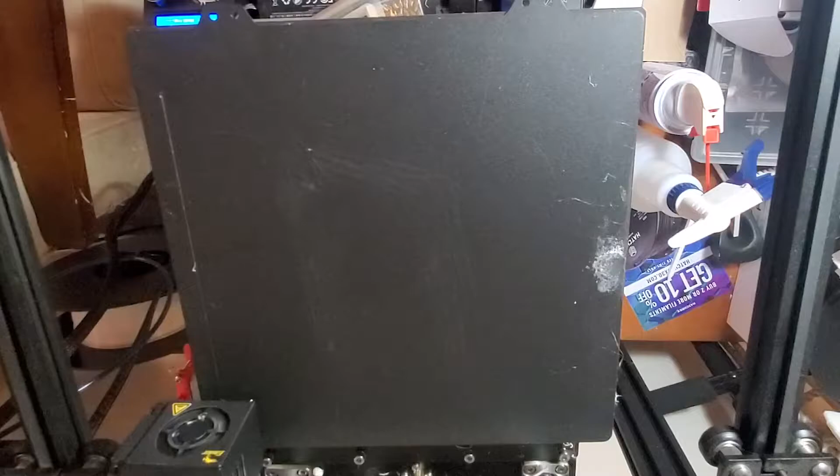Alrighty, this is the first time this is all assembled. I'm really looking forward to pulling this thing back. Hopefully it works really well. I haven't put it in the magazine, but we'll see.

Huh. I miscalculated something.

Hello all. I wanted to show you guys my crossbow project, my Expo project: 100% 3D printed parts, no steel, no extra gizmos required, just 100% printer filament and a little bit of super glue.

I've been working on this project for a couple months now, and I really want to show you guys the 3D modeling touch-ups and some of the labor it takes to put one of these puppies together.

Also the design process through iterations. You'll see me fail over and over.

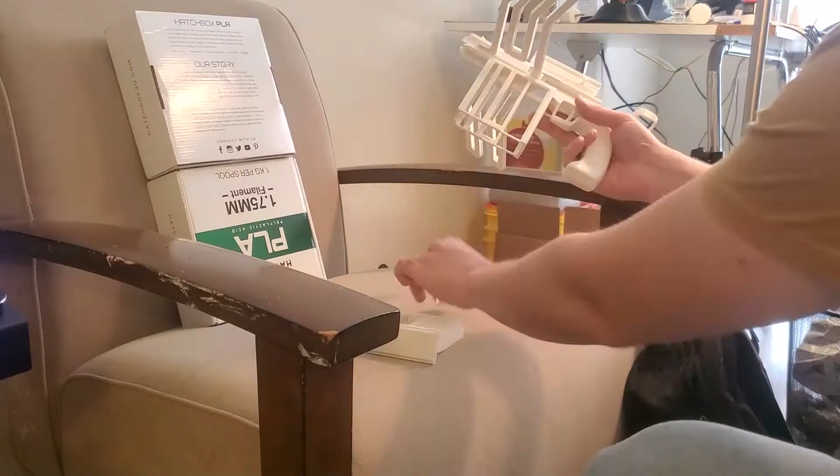Yeah, enjoy. Loads up. You got one. You got two. It's loaded.

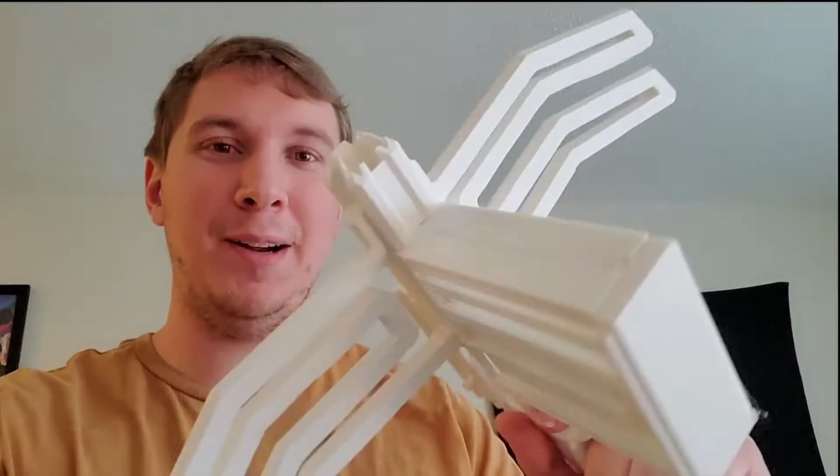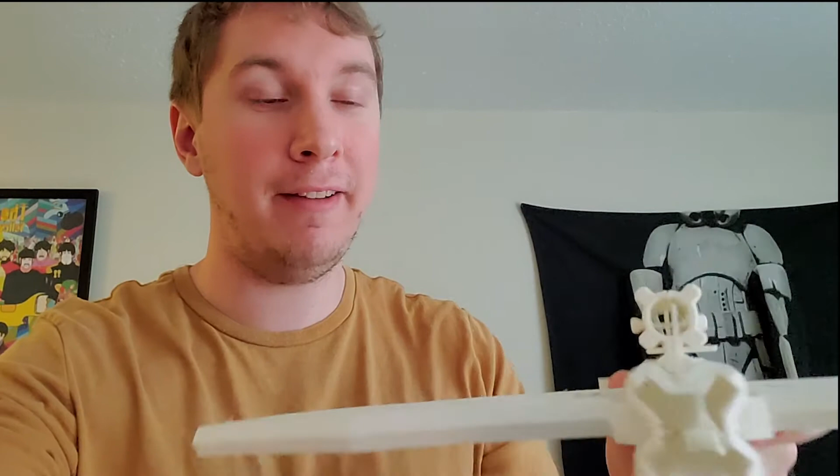Yeah, I'm proud of my little thing. It doesn't have the range that I want it to, because I think I need to redesign the bolt to make it more front heavy so that it doesn't bend in the air.

But yeah, I really like the design overall. I think it's weird to have this all done with 3D printed parts, but yeah.

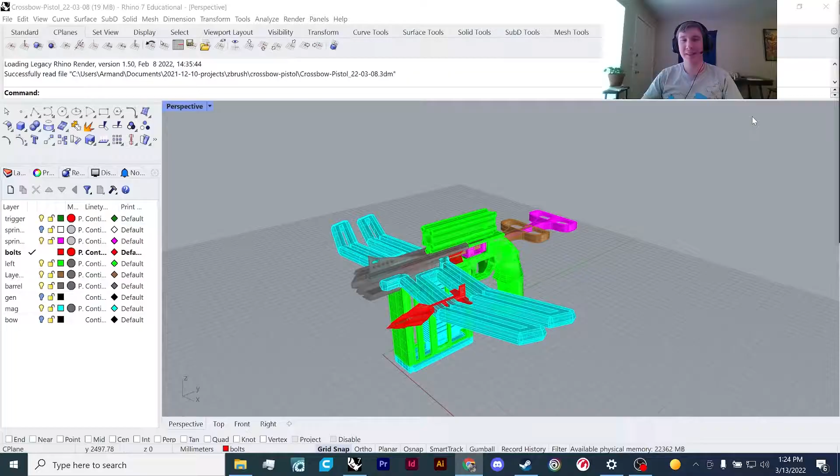So after looking at my model and looking at my bolt, I realized that I need to do some 3D modeling touch-ups, so here I am doing it. Alrighty, let's 3D model some stuff.

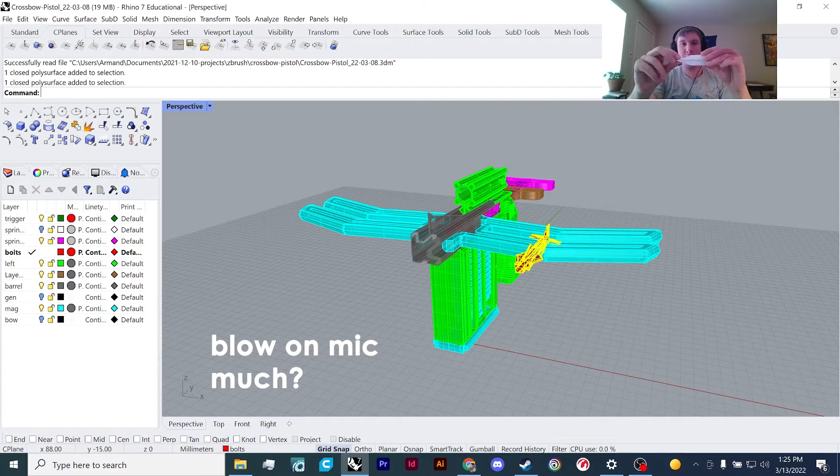I want to mess around with this little crossbow pistol. I wanted to take this particular design for my crossbow bolt.

You can see in here that current one. So that's the old version. And you can see it has this sort of twist, and I thought that the twist would help it sort of spin.

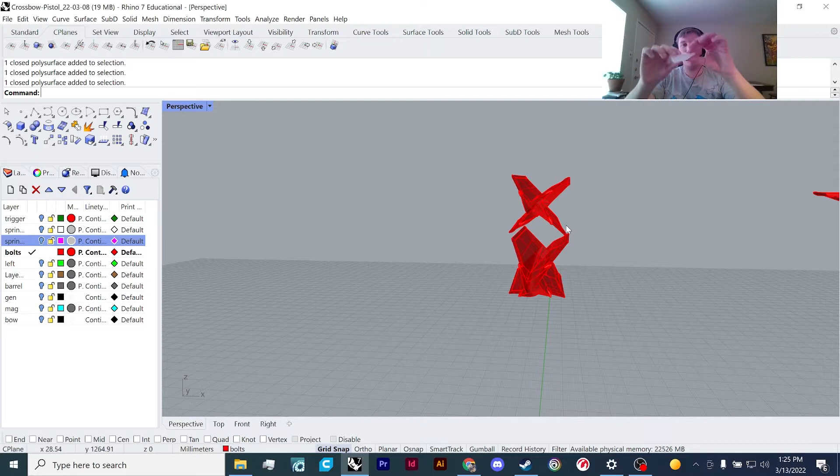And when it spins, it'll theoretically make it more stable. But what ended up happening here was it would start to twist and then it would tumble because the center of mass was too far in the back, and it just sort of didn't work out so well.

So I redesigned it. Oops. I don't know where the other part of it was, and I made this, except it had this little tail fin, which you can see right there.

Something I realized when this little part broke into pieces is that this shoots really fast, like really, really fast. It shot across the room instead of just shooting into a pillow, which exceeded my expectations

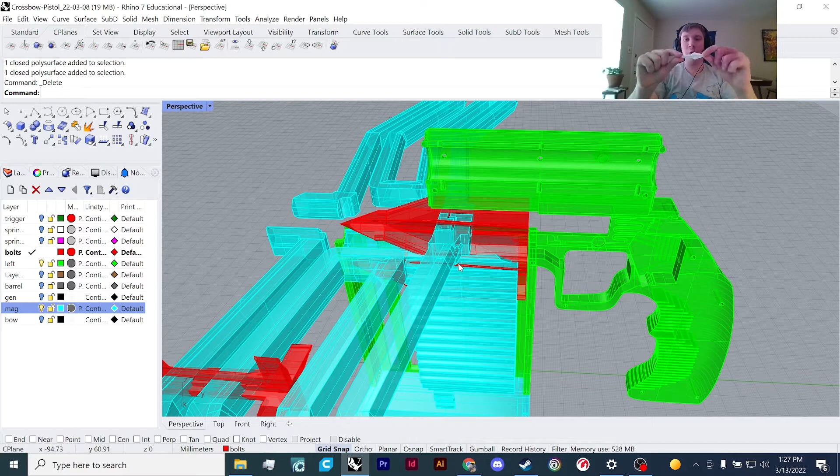without having a lot more power in my spring system. So let's just undo that. So I'm going to redesign my little device here.

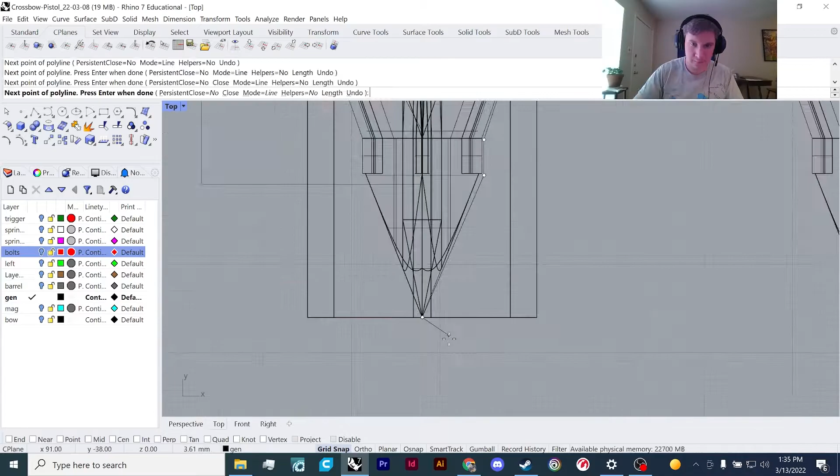Non-copyrighted music goes here. Yeah, it's stuff and modeling and yeah, non-copyrighted.

All right. Now, the next big thing I wanted to do with my model was redesign this bow here and here,

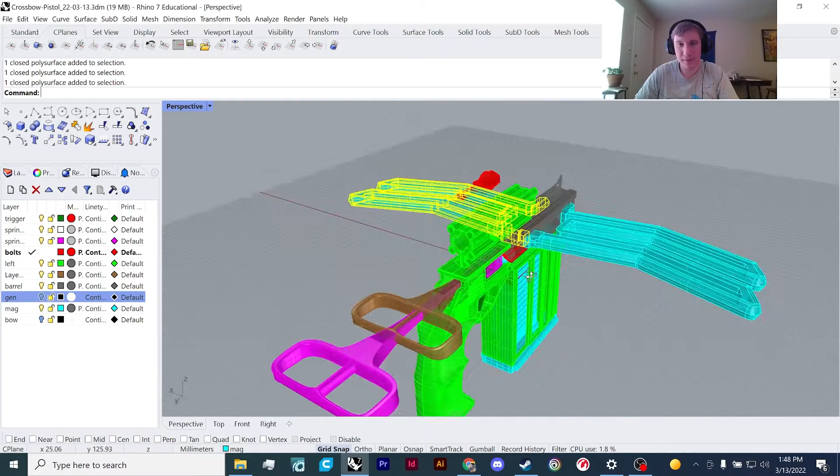because it's strong how it is and it works well for a little gizmo that I currently have, but I want it to be stronger.

I want to see if I can do some real frickin' damage with this thing, because if I can do some real gosh darn damage with it, that'd be cool.

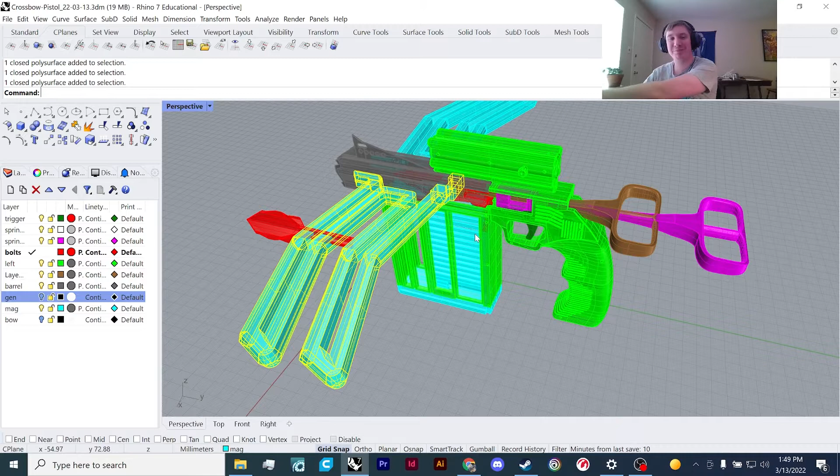Not advocating using this to hurt anything, but still be fun to mess around with some cardboard or whatnot.

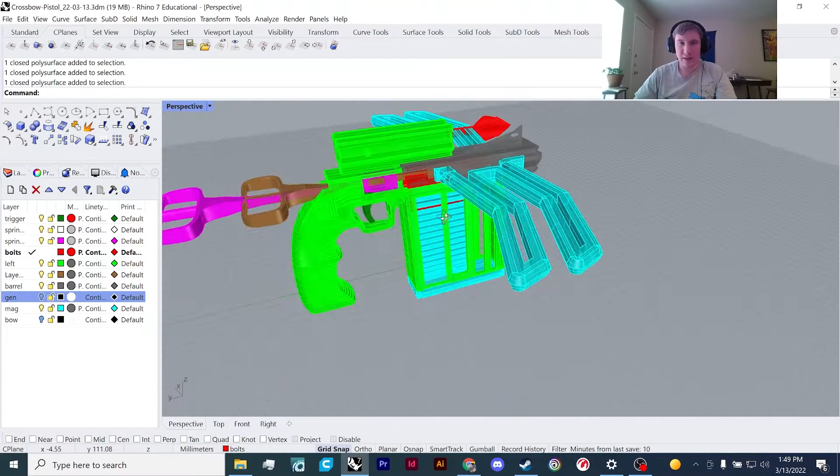See, so I need to make these thicker, but I'm not sure how I want to do that because I still want it to look cool and not just make it extruded up.

I still haven't found any non-copyrighted music, so yeah, let's just talk about modeling and stuff for this time lapse. This time lapse thing that I'm doing, and yeah.

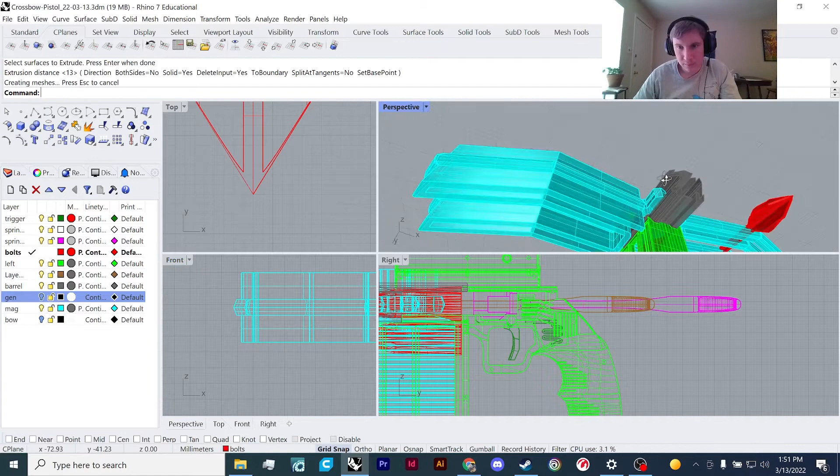I'm thinking that might be a little bit too much height. Yeah. So undo that.

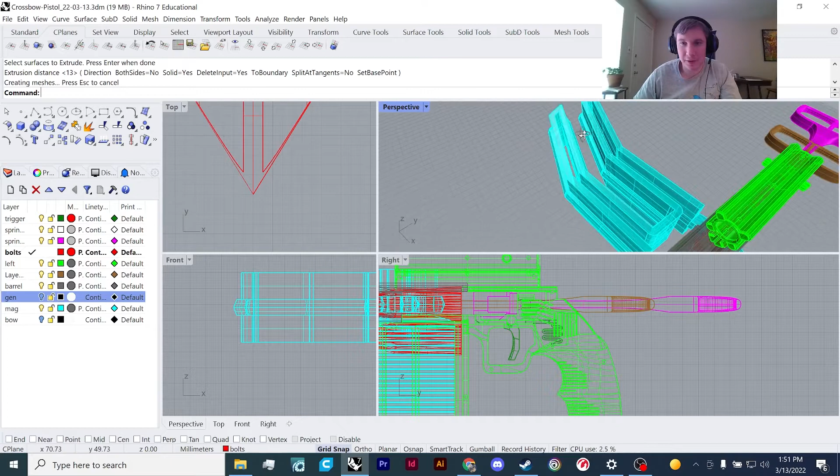I made this sort of cross-sectional, I call it an accordion spring. I don't know what it's actually called. I did this so that I could

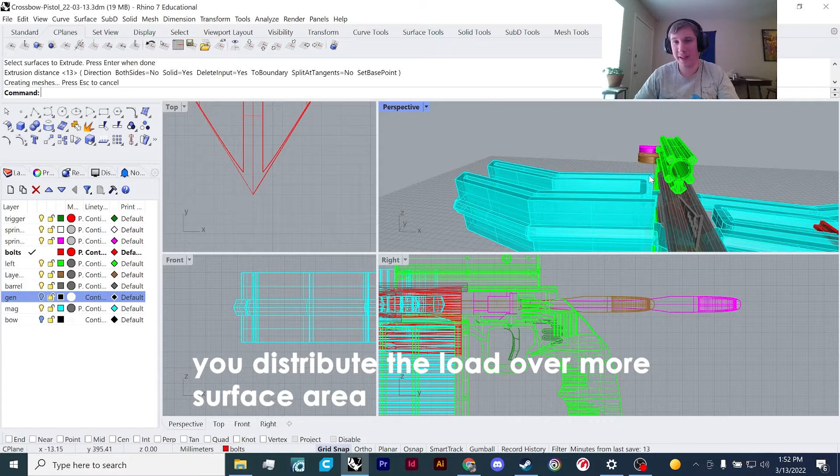make it more, distribute the load over more surface area. When you distribute the load over more surface area, you'll get a lot more strength.

Otherwise, one second. Another reason why iterations are important. Otherwise, you get... so this was my initial system. This one did not work for a lot of reasons.

I didn't even try pulling back the spring all the way because I wasn't comfortable with it. So, I did reprint it, and I made modifications, and I thought this system would work.

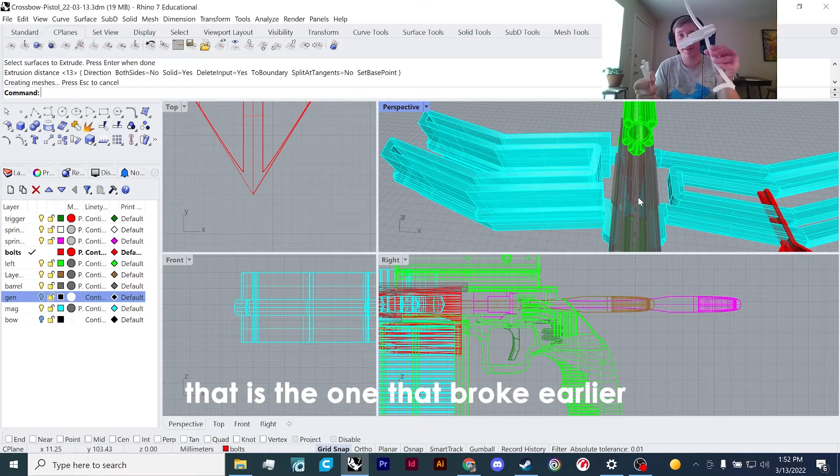Obviously, it broke at high velocity, and it cracked really bad. Oh boy, it was so dangerous.

I think I lost one of the pieces that sort of held that whole corner together. Oh boy. Anyway.

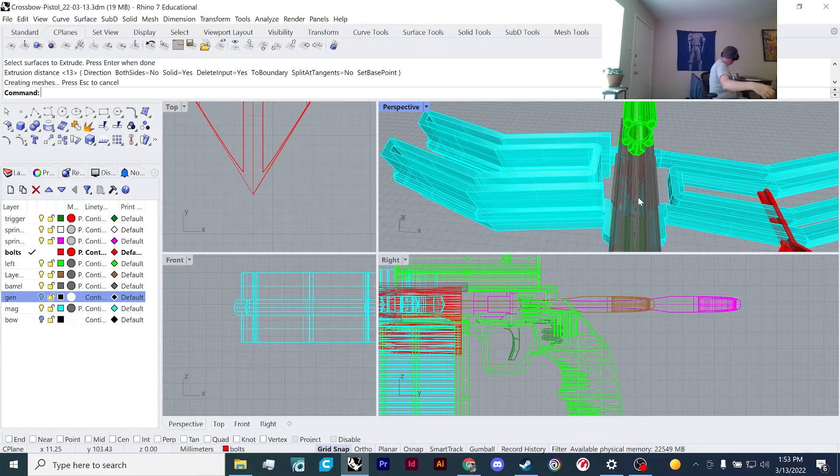I still haven't found any non-copyrighted music. This is such a long thingy to just kind of fill in with filler of fillness. I'm modeling stuff. I'm talking about other models I've modeled in a modeling program for modeling.

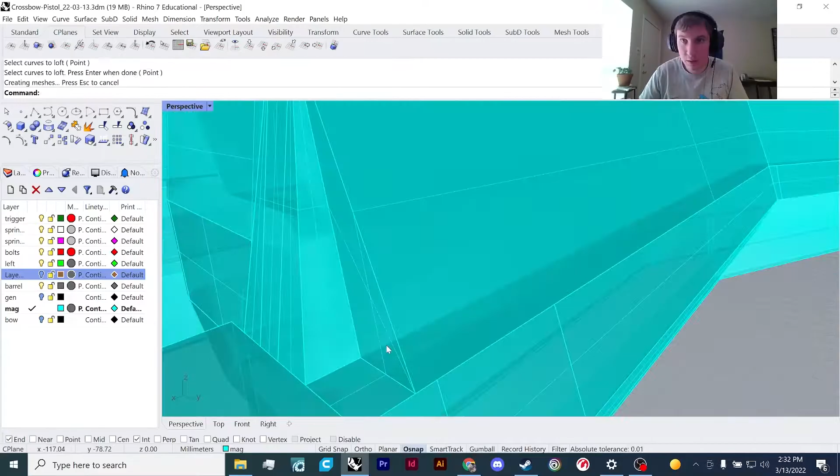For fuck's sake, just fuck! I can't figure this out. Stuff, filler, words in a row.

I'm programming stuff now. I'm looking at my model to see what I need to improve. Bugger. There's just nothing else I got.

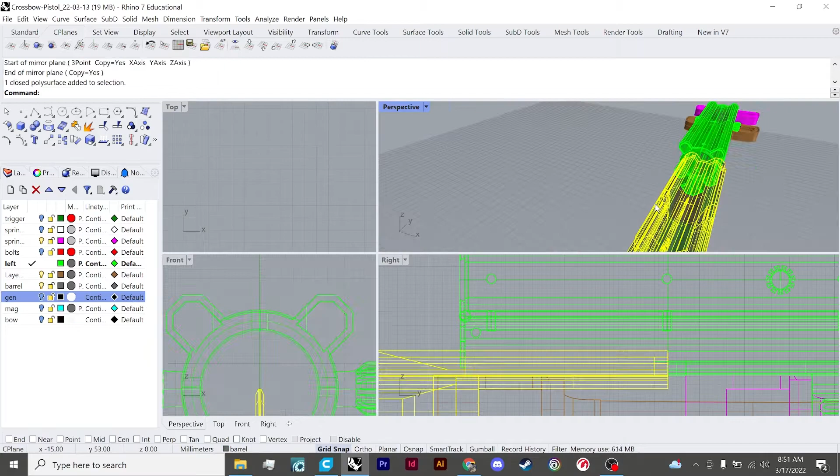Just stuff and things. And come on, time lapse, go faster. Just a little faster. I only got so much breath in my lungs.

Come on. So the objects are printing now, both the bolt and the new accordion bow. The next scene will be me taking off the supports and cleaning up the print.

So, yeah, I hope you guys enjoyed the 3D modeling touch-ups and sort of seeing the introduction for my crossbow pistol. I will be doing the 3D print cleanup in my next video for all my new parts. I will see you guys next time.